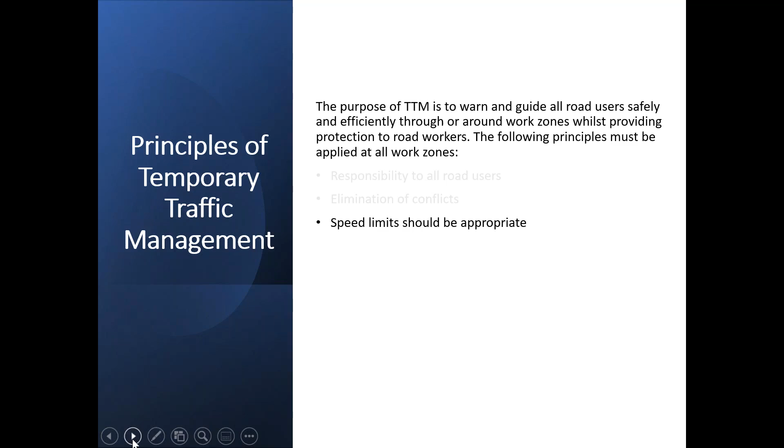Responsibilities: traffic management requires the contractor to provide a level of responsibility, a safe responsibility to all road users. It's designed to eliminate any conflict between members of the public using the carriageway and those conducting the works. Speed limits should be appropriate throughout the traffic management at all times, and it's designed to protect the people actually doing the work.

So we look at barriers, different types of barriers. We can refer to the protection area of the workers, the work zone, and early warning of any hazards.

Now, the biggest hazard the driver is going to face is that there is something in the middle of the road that he's been driving down for the last year, and all of a sudden there's concrete barriers, signposts, machines, low loaders, lorry loaders, etc. Traffic management requires that we provide early warning to these drivers so that they can take the appropriate actions to avoid what is now in the middle of the road.

Clear directions to all road users, to navigate around any obstacle or obstruction, be it excavation work, reinstatement work, etc. It requires that traffic control devices must be deployed appropriately.

When we look at words like adequate, suitable, sufficient, appropriately, that means we have to comply with the requirements of the work zone traffic management guidance document. Although it's not a statutory document, more of a contract document, where it says appropriate, suitable, sufficient, to demonstrate due diligence we follow the work zone traffic management guidance and the advice given within it. Because it's a guidance document, it can be a little bit flexible, unlike legislation requirements.

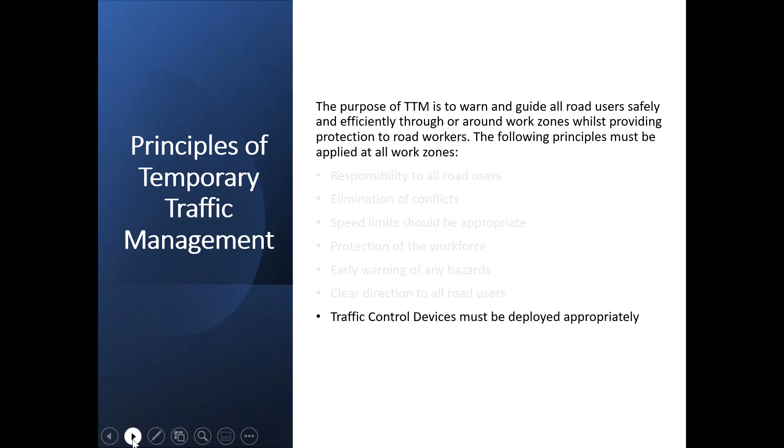The first document, and probably the only one I'm going to cover, is the traffic diversion plan, often referred to as the TDP. This outlines, and in a particular traffic diversion plan, you'll have copies of the registration forms, any permits required to close the road, excavate on the road, etc. These are some of the documents you'll find in your TDP.

Traffic management drawings show the layout and the amount and locations of any traffic management devices you're going to have as part of your traffic management. These are all sketched out, and they require a number of approvals - the police, Ashghal, your consultant, and municipality as well. And if one of those signatures isn't there, then I would suggest your TDP is invalid.

So make sure everyone's aware. You do get some conflict between Ashghal and the police or the consultant or someone else, but it's up to the person managing these works to sort out those issues, sort any conflict out regarding what is required.

But the main thing is these drawings - there are examples of traffic management plans in the back of the work zone traffic management guidance. As long as you follow the examples - 3-lane carriageway, 2-lane carriageway, single-lane carriageway - go out and do a recce, a survey of the works, your TDP should be fine. Just bear in mind, don't over-engineer stuff.

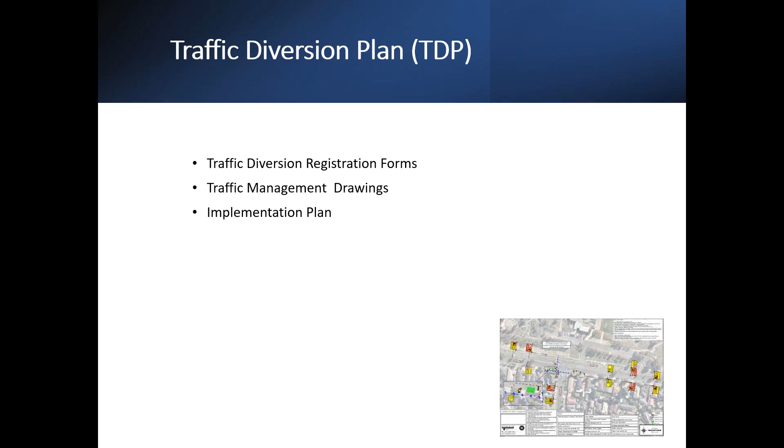As I said, a clearance plan and a contingency plan for any disasters - there's no such thing as a guaranteed safe system of work. You're working with road users, individuals you have no control over. You can't control their speed, whether they're on a mobile phone, or if they're having an argument with the wife and not paying attention. So you need to have contingency plans for emergency situations.

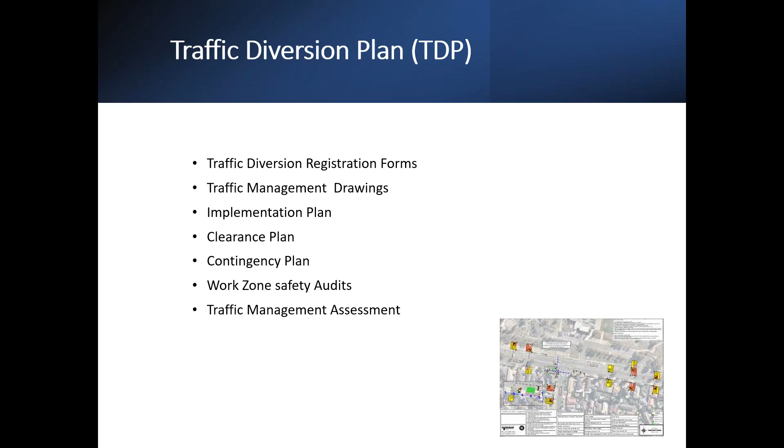ASHGAL will and can come out and do work zone safety audits to check that you are complying with your TDP, and if you are not, they can revoke and suspend your works or give you a prohibition notice or improvement notice. Traffic management assessments should be done internally by yourself, but these can also be carried out by your consultant or ASHGAL themselves.

So let's look at components of the highways. Now we have the carriageway, which means where vehicles can drive and pass along during their journey, but it also includes the median. Some highways have a central reservation filled with roadside furniture, lights, poles, grass, etc. In Qatar, a lot of the medians, the central reservation, is fenced off to discourage people from walking from one side of the carriageway to the other.

The carriageway also includes, at the same level, any pathways or cycling lanes. So you need to consider that as part of your TDP, your traffic management plan. If curbs are at the same level, you're going to have pedestrians and cyclists traveling along that pathway, so you need to consider the protection of those people during your design, your traffic management design stage.

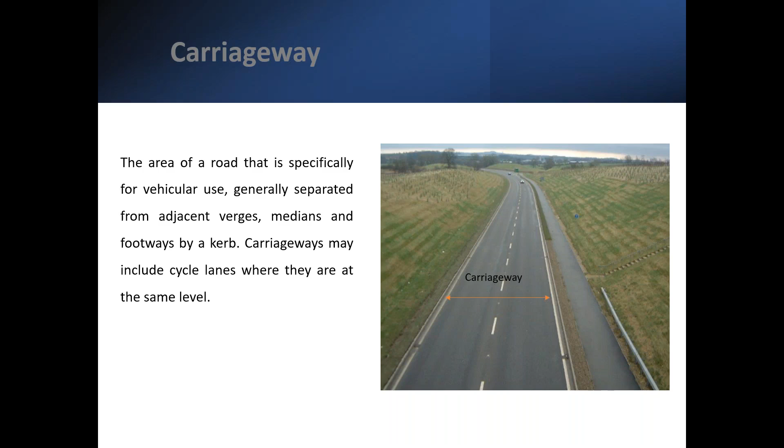So that's basically a typical single lane carriageway, cars coming from left to right and right to left. And obviously we have double and triple lane carriageways. So that's the typical carriageway.

Then we have the right of way. This is the area of public highway, generally between property boundaries, and it encompasses the carriageway, the median, the footpath, and the clearway, which I will discuss a bit later. So that's a typical right of way.

If you are doing any traffic or construction works within this area, you need an approved TDP prior to commencement of the project taking place, not afterwards. And if it expires, make sure it's renewed before the expiry date. Like I said, what you don't want is an errant vehicle crashing into your traffic management and you find out that your TDP is invalid. It will cost a lot of money - basically your site will not be insured. So that's generally the right of way.

If you create any obstruction on the right of way, then you need a TDP. Okay, carriageway, cycleways, footway, verges, and the medians.

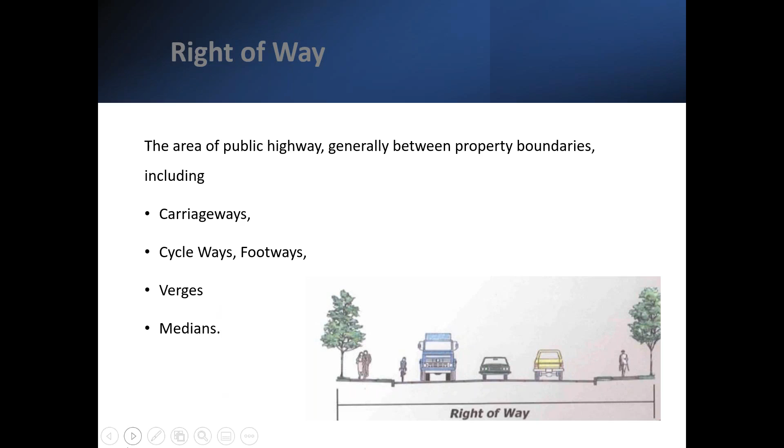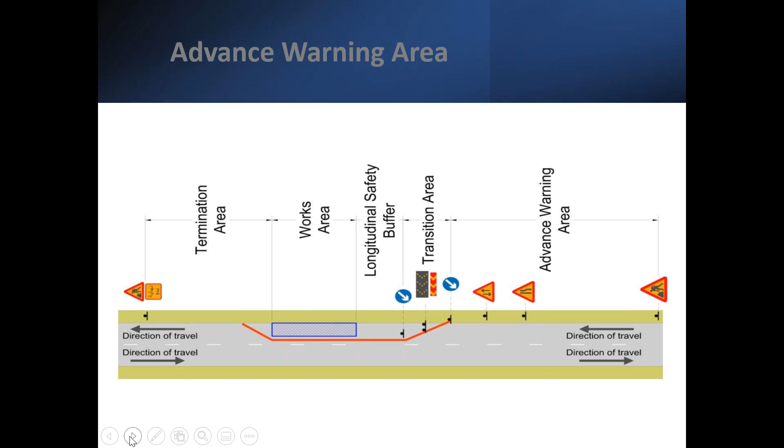Advanced warning areas - as I mentioned earlier, you need to give adequate warning to drivers, all members of the public, that there is an obstacle along their route, in the direction they are travelling. The advanced warning area is generally made up of specified signage, standards-type signage. I'm not sure what the number is, but they have to meet certain specification. These warning signs are located indicative of the speed of the traffic, so the greater the speed, the greater the distance between each sign.

So, advanced warning area - approachers are informed that they are entering a work zone, i.e. that you've just dug a great big hole in the middle of the carriageway, or are doing some other work that's going to inhibit their driving.

If a temporary speed limit applies within the work zone, we need to give all drivers enough warning so that they can reduce their speed and drive past the work zone, or on some occasions through it, at the correct reduced speed. There's been a lot of research, particularly with the Transport Research Laboratory in England, about certain speed limits, because if you reduce it too quickly, you get a spring effect where one car brakes, the next car brakes, and the fourth car slams into the back of the other one. So the speed reduction sometimes might be gradual, from 100 to 80, from 80 to 50. But the reduction in speed needs to be well advanced so that all drivers can adhere to it. The length of the advanced warning area varies according to the approaching speed.

Your traffic management is implemented based on the approaching speed, not the speed you've reduced it down to. So if your speed is 100 kilometers and your warning signpost should be 100 meters out, that's based on the current speed, not the reduced speed of, say, 50 kilometers, where advance warning signs may be a little closer. Traffic management is always designed and installed based on the current speed, not any speed you use to slow traffic down.

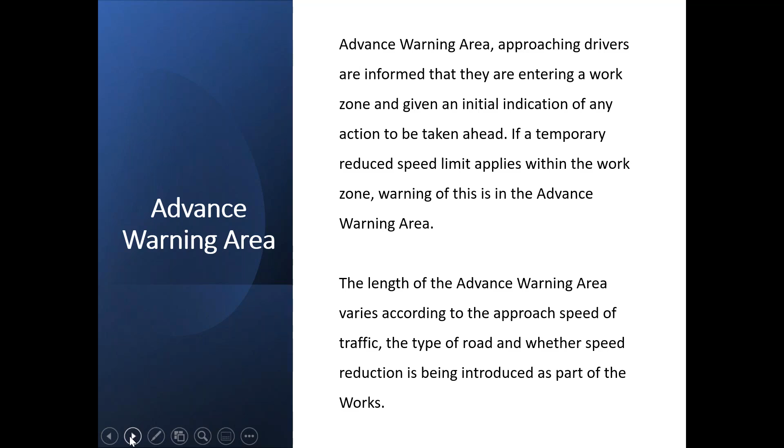Standard signs need to conform to specifications you can look up - warning, mandatory, regulatory, information and directional signs all need to meet the spec. You can't just cut a piece of wood, paint it white, and start sign writing your own signs. They need to be visible both in daylight and at night time.

The reflective quality has to be correct as well. But you can't mix the signs up - you can't put a regulatory sign on a blue background, or a directional sign styled as a warning sign. So that's the background for signs.

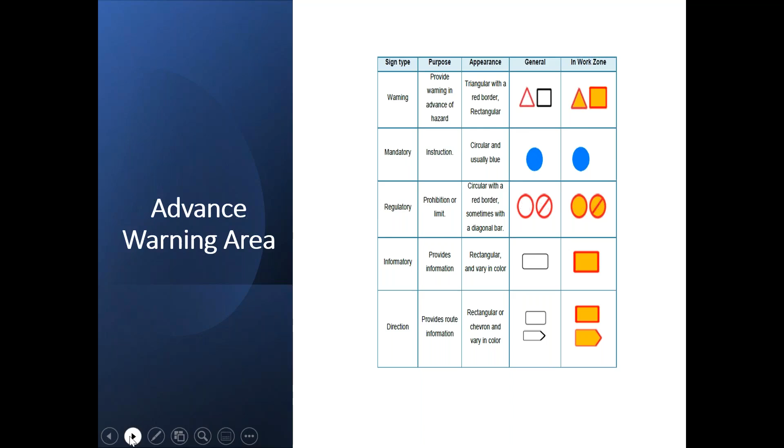The size is determined by the speed of the approaching traffic. Signs associated with a work zone speed should be taken accordingly. If a temporary speed limit applies, signs in the work and termination area may be reduced by one level - for example, 120 within a work zone subject to temporary speed signs may use 900 millimeter signs rather than 1200 millimeter.

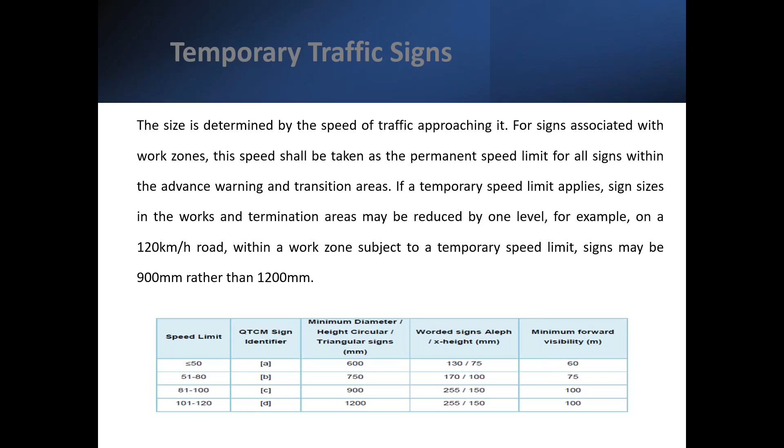Basically, every traffic device you install is based around the speed of the current traffic. This table shows what type of signs you need - for speed limits 51 to 80, 81 to 100, it shows the sign identifier, height of the signs, word signs, height of the letters, and minimum forward visibility for each sign. This prevents someone in the back of the yard making up their own signs to fit their own purpose based on whatever material they've got. These signs have to meet specific specifications to give the driver advance notification that there's something in the middle of the road ahead.

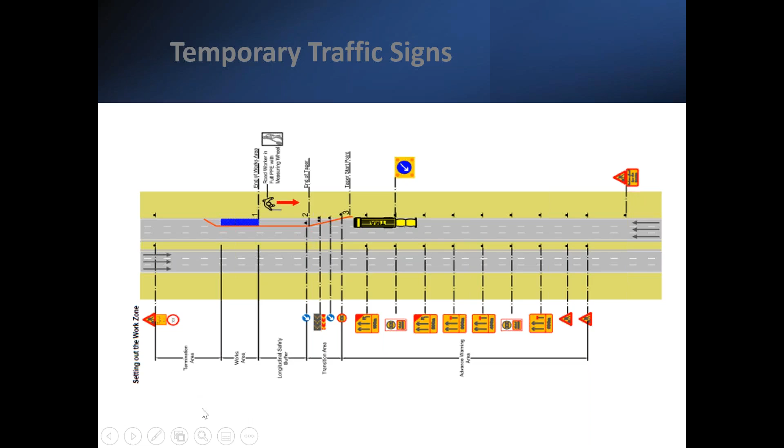Temporary signs - I see a lot of these stuck on posts or posts surrounded by concrete so they don't blow over or shift. But bear in mind it says at the beginning that signs have to be able to shear on impact. You don't have control over all drivers or the manner in which they drive, and there are occasions when they're not paying attention and the first thing they hit is one of your signs. These signs need to break off and must cause minimal damage if hit by a car, and generally they shear at the bottom so they lay flat.

If you hit anything else, such as a concrete pole, you are going to cause severe damage to the vehicle on impact. And on some occasions, we've seen profiling and modeling where a vehicle has hit the bottom of the post and the top of the post has gone through his windscreen.

So there are specifications on how you should support your signs. It says all temporary sign support structures must meet relevant crash testing specifications, such as EN 12767, and be approved for use by Ashghal, which means you cannot just stick a sign on a tree next to your work zone or on a lamppost. The purpose of traffic management is to ease cars through and reduce the severity of injury if there was an errant vehicle, so signposts and the structure supporting the sign all have to meet specifications.

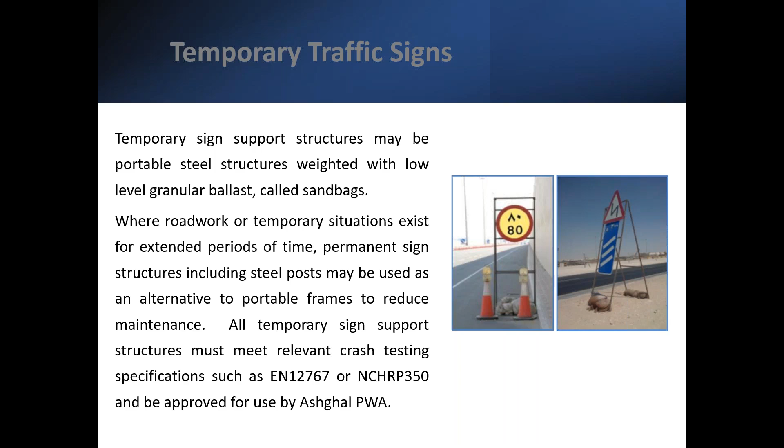Transition area - this is the area that the driver will see, or hopefully not see, before the work area. This should provide enough information for the driver to either stop, meaning he can't proceed any further, or he needs to switch lane.

The taper is indicative of the speed - the faster the speed, the longer the taper. These have to be lit up so the driver can visibly see them, and this is where you get your directional signs, your LED signs, and directional accent, because it's giving the driver the last warning that he cannot proceed any further without causing an incident to himself or anybody working in the area.

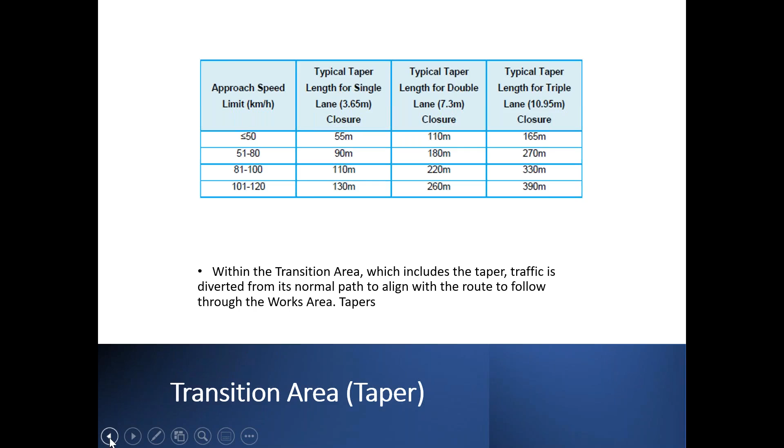What's most important is that you store no material here. As I said, if a car was to hit that, we need to be able to reduce the severity of injury or damage to the vehicle. Sometimes these are cones and plastic because they're just a transition area here - if a car does hit that, you don't want it driving into a block of concrete blocks or other construction material that would cause a lot more damage than hitting the barriers here.

The length of that is indicative of the speed of the road, and on high-speed roads, you'll probably find that that is somewhere up here, once again to give the driver enough time to respond and move out of the way. And that's some drawings.

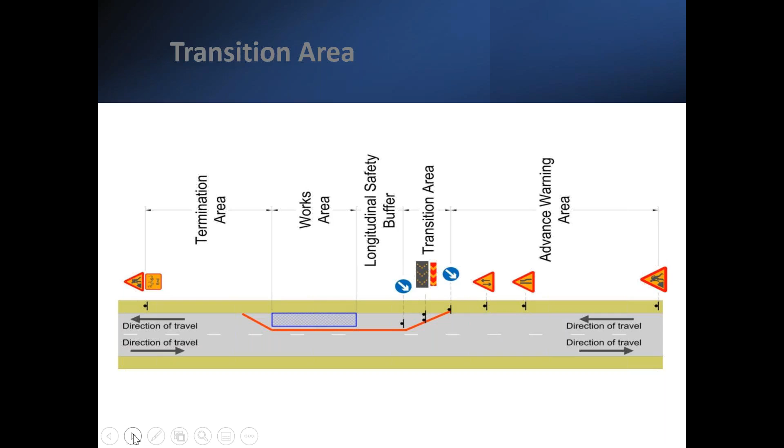The taper is based on that timing, but in some local residential areas it may be impractical or not reasonable to install your taper in line with the speed limit. So where the speed limit is reduced, or at a speed of less than 50 kilometers, you can use a 1-to-1 ratio. Having said that, you still require a buffer zone between the leading edge behind the taper and the work zone, because a 1-to-1 ratio is very short.

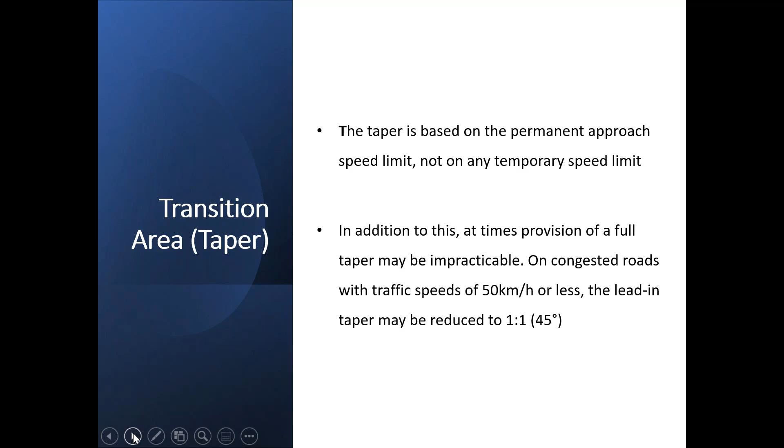What you can't have is your traffic management perpendicular to the carriageway - it always needs to be at an angle, even a 45-degree angle. If you're using plastic barriers, that's still 4 or 5 plastic barriers that you would need. So it's not just the case of, oh, we've got a truck pulling up for 15 minutes, we'll just stick a barrier in the way - that wouldn't be appropriate or suitable. That's the taper area.

We have the workspace between the taper and the buffer zone here. Once again, this is for the errant vehicle to crash through - probably not the best word - and continue.

Don't forget he's on his brakes here. Hopefully he's on his brakes. So he should come to a stop within the buffer zone here if he's traveling at the correct speed before he gets to the work zone, which is where all the workers will be located.

This area here must be kept clear at all times to accommodate any errant vehicle from missing the taper end and driving through your traffic management. So once again, the safety area, the buffer zone, longitudinal safety buffer must be kept clear of all construction materials.

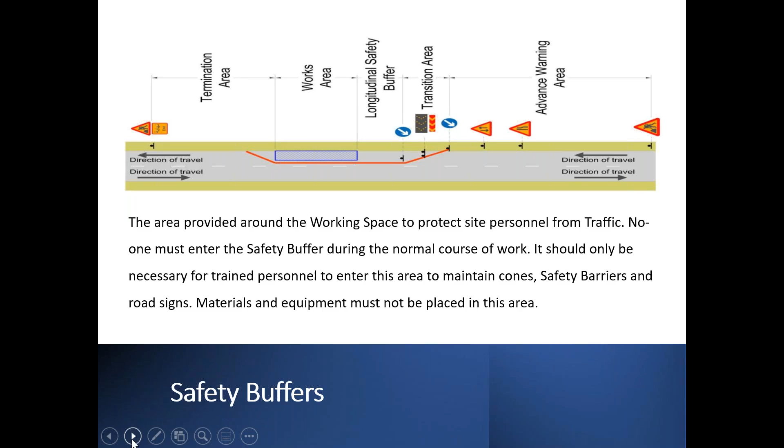There is also a typical length of the longitudinal buffer area. Once again, at 120, the buffer area should be 55. So if you add that to your taper as well, for example that may be 130 meters long, add the two together, and that is your area of safety for your staff, and that is the area where the vehicle under its own steam should be able to stop without driving into your work zone.

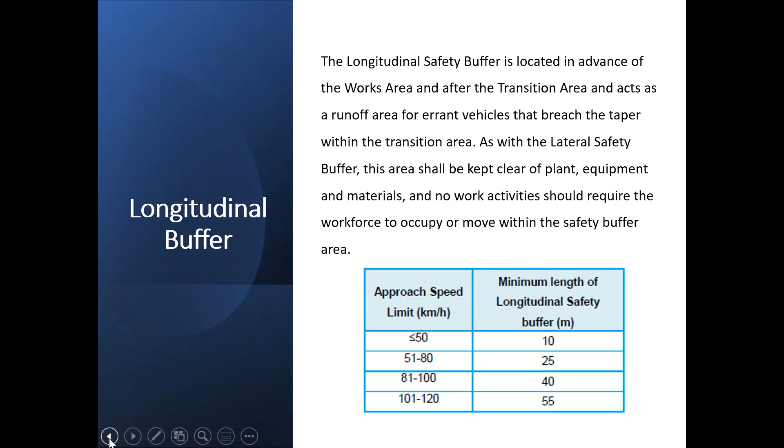Remember, we're protecting the workers as well as members of the public. So there's tables there that will give you guidance and reference on distances. The distance between your work zone and the edge of your traffic management - you now have the calculations for this in the table, and this is your safe area.

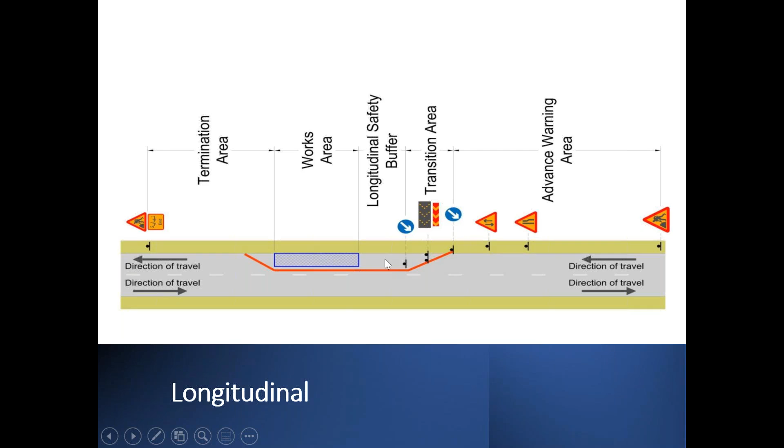There is also another buffer area, and that is to the side of your work zone, and that should be around about 1.5 meters. Why it's 1.5 meters is because under a number of tests, if these are concrete barriers and they are secured, the deflection of a concrete barrier will be less than 1.5 meters, providing - and this is a caveat - that they are connected together.

If your concrete barriers are not connected together, then they create more danger than if they weren't there. A concrete barrier will fall into an excavation if it's hit by a vehicle traveling at 30 kilometers an hour. There are cases where that has occurred, and you do not want a 250 kilogram concrete block falling on somebody's head. So there is a buffer zone of 1.5 meters.

The problem is in some areas your excavations are too wide, and therefore in order to install your barriers to provide a 1.5 meters, it means that you are encroaching on the other carriageway, and therefore you need a more in-depth, more detailed traffic management, or if the police allow you, a road closure.

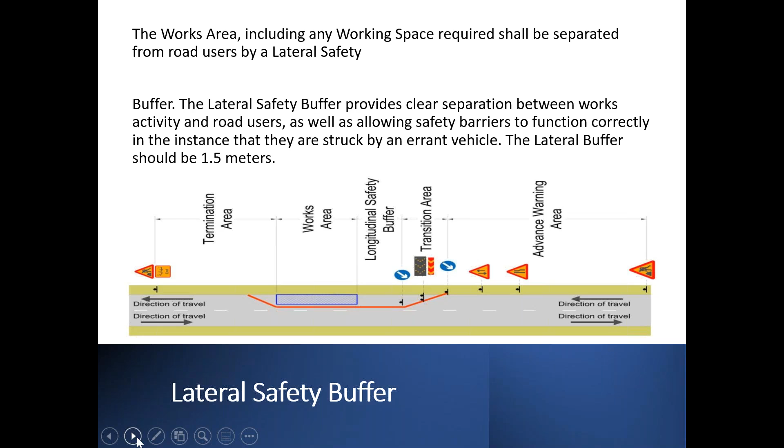So there's two safety buffers: this one here, the longitudinal safety buffer, and the lateral ones. Once again, to reduce the severity of injury of the vehicle or the men at work that are working within the work zone. And any diversion from those specifications probably will invalidate your approach.

So this is an example of a safety buffer zone, greater than 50 kilometers. Workman here, vehicle this side, and this is your pedestrian walk through here. So you have the concrete barriers here, 1.5 meters off the work zone. The work zone is protected with supplementary barricades, just to make sure that the workmen and the members of the public don't start getting too close to your work area, any plant or equipment.

But this is a typical layout of what you'd want to see on part of your traffic management. Two sets of cones, outer cone, inner cone. If you've got no pedestrians that are likely to walk here, providing these are 1.5 meters away from the workers, you should be fine. But if that car hits that, that will swing. So basically, all your work should be planned on the opposite side of the trench or the excavation away from any traffic management.

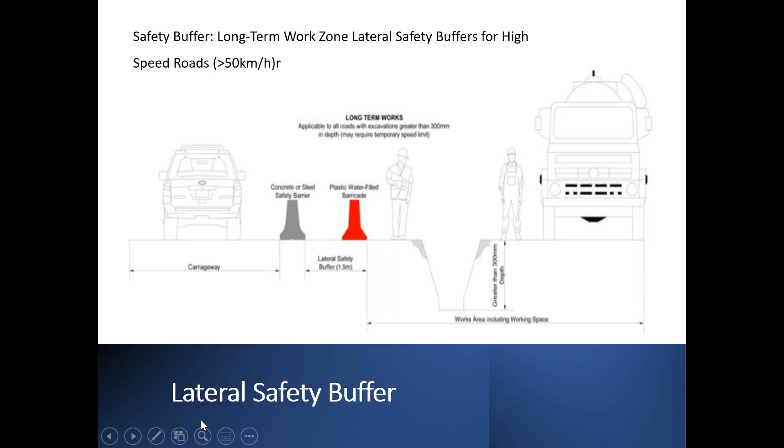Once you've protected your work zone with advanced warning signs, exit signs, traffic management devices and barricades, generally the work zone will come under QCS. The work zone traffic is about protecting members of the public and the workers, so it will come under construction safety, and QCS compliance will be required.

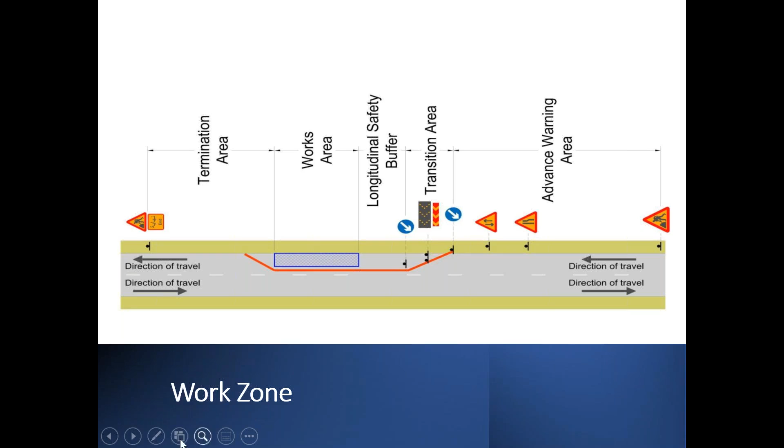Typical examples of a work zone, they can be in heavy congestion areas, or they can be small little temporary work areas.

Where you undertake any excavation work deeper than 300 millimeters, you must install concrete barriers. The reason being, if a car goes through a plastic barrier and continues into a 300 millimeter trench, it will probably capsize. So concrete barriers for trenches greater than 300 millimeters, and generally if it's long-term work, because you need to appreciate that plastic barriers move.

Your traffic management devices such as barricades are indicative of speed, congestion, population of the area where you're working, adjacent to schools where children play, etc. Probably that's the most critical part of your traffic management - what type of barricading are you going to use to secure your work zone.

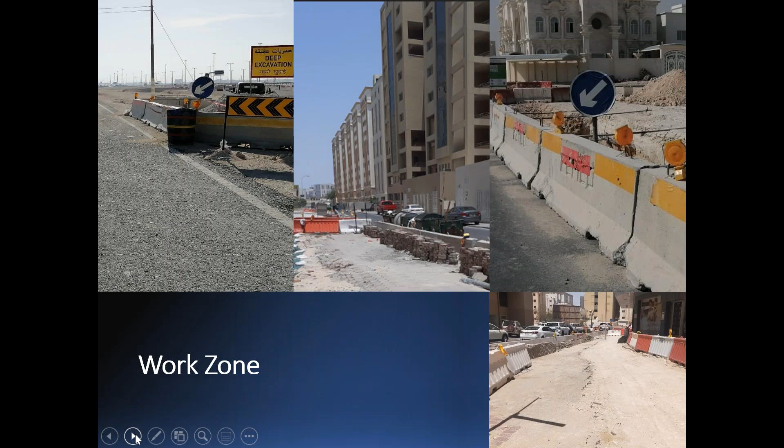So that's a typical work zone. Once you're in there, it will come under QCS, work at height, chemicals, electrical, plant and equipment, etc.

Temporary safety barriers have to be approved, both in design and the material that you are using. Sometimes they're referred to as F-shape, Oregon, etc, but they're all designed to direct the traffic away from the work zone - concrete ones I'm referring to here.

All safety barrier systems used in temporary traffic management - individual barriers, connection, attenuation - must meet minimum performance requirements. If you use poor concrete, they're just going to shatter like paper. If they're not connected, they're going to move, and what you end up with is a concrete barrier sitting in the driver's seat of the vehicle that just smashed into it. So the most crucial part is you need to make sure that your barriers are connected to work properly.

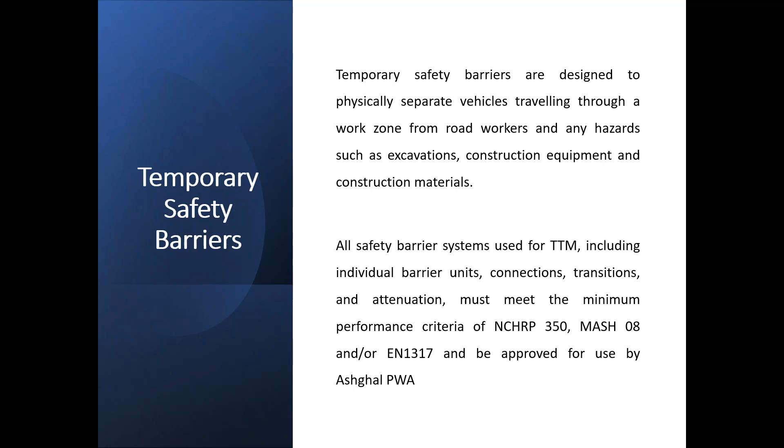Locations, types, and selecting your types, whether you use plastic, concrete, or cones - there's a nice table in the work zone traffic management which will help you do that. It's based on speed of traffic and the length of the works - for example, short-term works, like using a MEWP to change some light bulbs in an overhead light that's failed.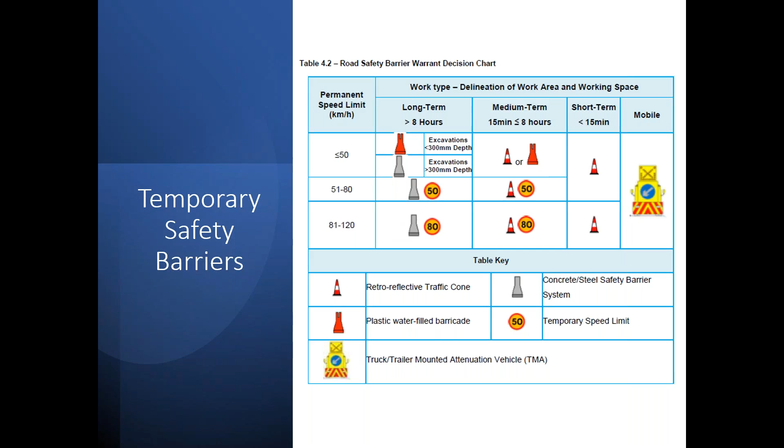Okay, temporary safety barrier, this is just another picture. Try to alternate colours, it makes them a bit more visible, whether they're red, black, red, white. I have seen some blue ones, so I'm not sure how they got approved.

And reflective materials here - don't try and glue them on. The heat will just dissolve the glue and then you'll end up replacing them, which means you need to put a man in the middle of the carriageway. So if you're going to install stickers on your concrete barriers, make sure that they're clean and stuck properly, or fixed with expansion bolts, etc.

But that's a nice example of how you would want to see traffic concrete barriers.

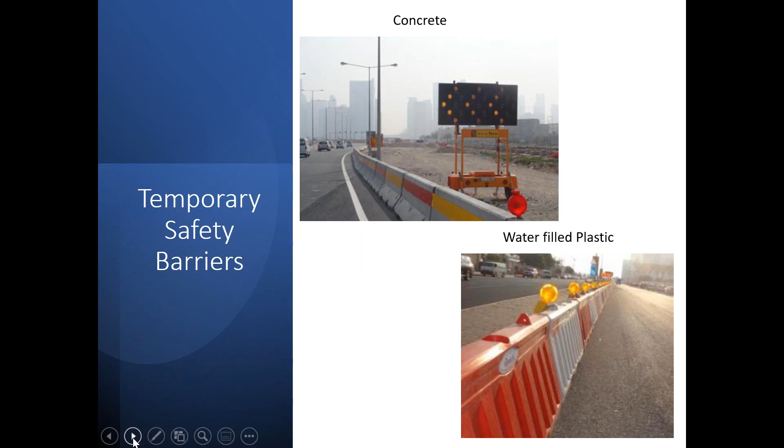Okay, plastic filled water barriers. We know that in Qatar evaporation exceeds rainfall, and it doesn't take long for standing water to evaporate. If they evaporate, it means you need to refill them with water, which means you now need to place a water tanker in the middle of the highway without any protection. This is where you would want a TMA in place, a crash cushion.

So we see sandbags that are sand contained in plastic, and the plastic gets too hot and melts, and then you end up with a load of sand on the floor, creating another hazard. To be honest, I'm not really sure what the solution is other than to fill them with sand, but then it makes them difficult for transporting.

But whatever method you use, your plastic barriers need to be connected and resilient to wind. We have some strong winds in Qatar, and you're guaranteed - take a drive after a windy day and you'll see these plastic barriers plastered all over the highways. So they need to be robust enough, or sited enough, that they're not subjected to wind tear.

They also need to be resilient enough to stop people from taking shortcuts and moving them. So things that can help are making sure they're connected, and that it's awkward for them to remove the barricades. If they want to jump over them, then they do that at their own peril, at their own risk.

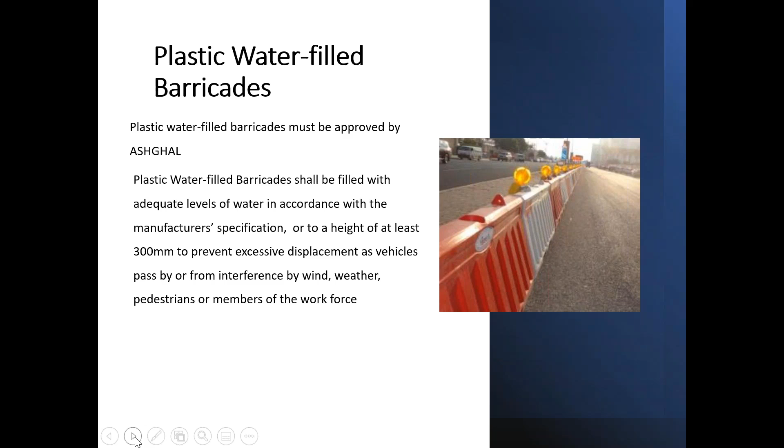A 2-ton vehicle traveling at 30 km/h generates enough force to shatter the bumper and the engine, so your bones aren't going to last that long. You won't survive the impact, basically, and modelling of research has shown that.

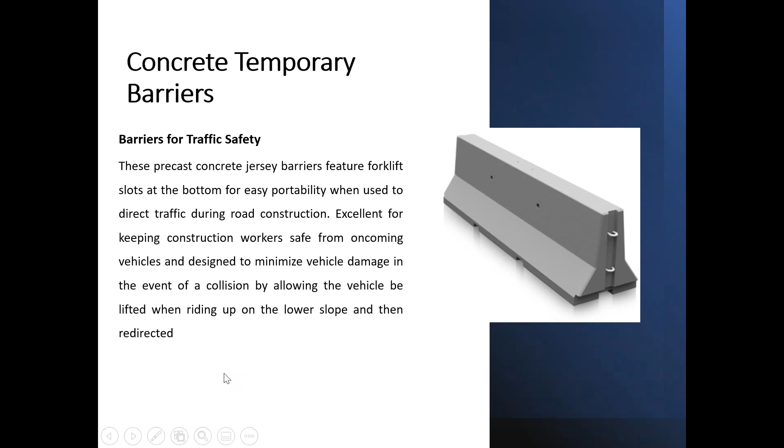The strength is not in the concrete barrier itself, but it's in its connection. You can go on YouTube and look at crash tests, and look how effective these barriers are when they are connected. Now, there are alternatives - people using supplementary pins, but I'd always advocate that you use the correct design pin and not just a 16 gauge or 12 gauge rebar, or some tensile wire to tie them together.

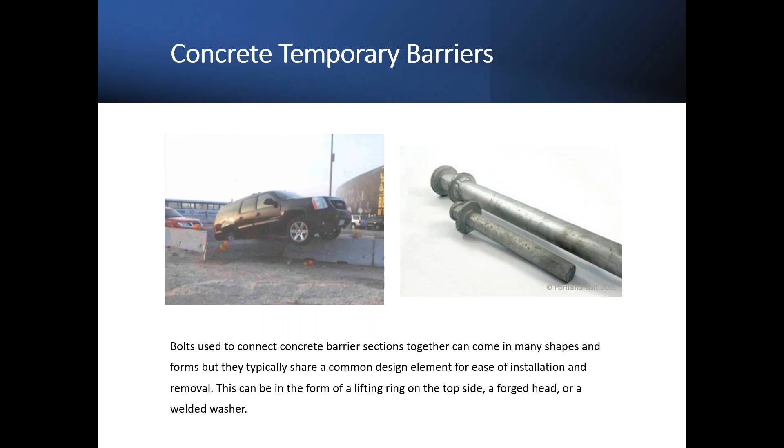Remember, these are designed to stop people from killing themselves, both the driver and the vehicle. So traffic barrier integrity is critical and important here. But you wouldn't ask anybody who oversees, manages, or supervises traffic management not to enforce that these barriers are connected. As I said, one barrier alone is a death wish, to both the driver and the operator.

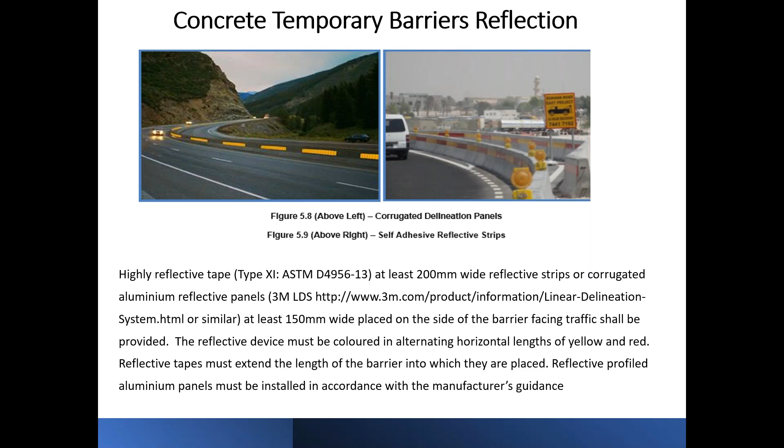So reflective materials, as I mentioned earlier, need to conform to specification as well. You can't just go there and start painting reflective materials on or making them up on a printer in your office. These are subject to specification, and the spacing too. If you're traveling fast and they're too close, you just get reflective glare, and that applies to lights as well. There's guidance there, and I believe this handout is readily available on the IIRSM webpage or our branch webpage, so you can go back and read the material.

Lamps and warning lamps - the requirement QCS says that they need to be in place during day and night, but ideally they need to be working at night time. We don't need to go around and check that your lights are all working when the sun is out there shining, because it's just a waste of time.

There are spacing requirements as well, and if you're not familiar with the moth and the flame situation, briefly - where you look is where you go. So if you're driving along and you're seeing all these flashing, blinking lights in your eyes, it's causing a distraction from what you should be focusing on, which is driving along safely. So make sure your lights are spaced correctly. Otherwise, you'll just get the disco effect and the disability glare - disability glare, not reflective glare.

You only need lighting where there is an obstruction in the road to provide additional warning. Now, I'm not comparing two standards here, but Chapter 8 and an early version of the work zone standard advocate that you do not need flickering lights where you've got overhead lighting, because you can see the barricades easily enough, and the flickering lights will not add anything to reduce that risk. Having said that and dismissing it...

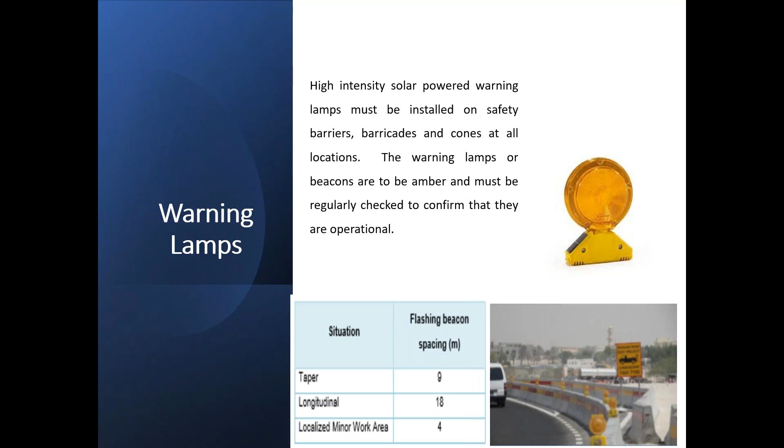The clear zone allows vehicles that have lost control to come to a safe stop without hitting any roadside furniture or construction materials, safely under its own braking. So even if you are beyond the work zone or right of way, don't start storing materials, excavation plants, machine 360s, etc. in the clear zone. That needs to be kept clear at all times.

Having said that, you do get lamp posts in there, you do get the odd bench, but during the work zone these areas will be protected by advanced warning signage and maybe some light cushioning. This is something you need to consider as well.

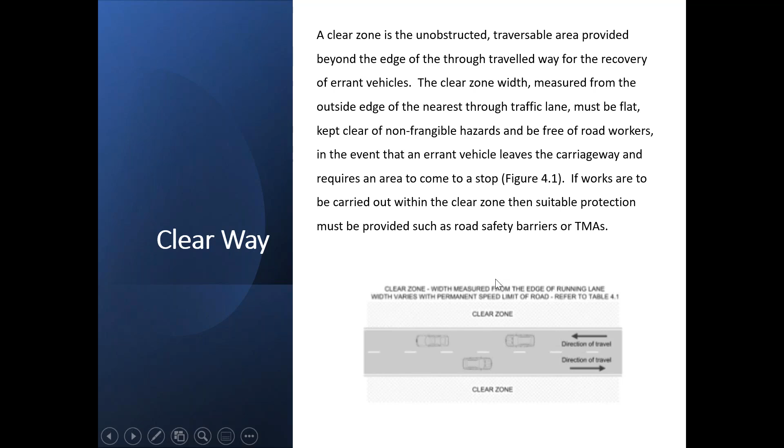Part of your traffic management is the clear zone. How wide should the clear zone be? Once again we have this lovely little table that tells you. So at 100 to 120, your clear zone should be 12 meters away from the traffic management or your work area.

However, in some cases, an object beyond the clear zone may still require removal or shielding.

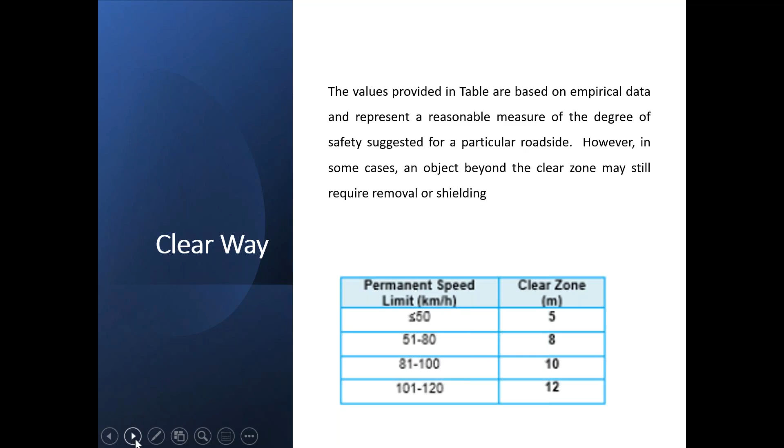Pedestrians. Pedestrians are a nightmare, and they're a nightmare because you have no control over them. You have control over the workers, visitors, the client entering your work zone. What you don't have control over is a member of the public deciding they're not going to walk around, they're going to walk through your traffic management or work zone because it saves them 5, 10 or 20 seconds.

So foreseeing that and knowing it's predictable, we have a duty to consider pedestrians as well. Within any work zone, make sure part of your traffic management design considers the safe access and egress of pedestrians walking past your work zone, because if you don't, they will walk through your construction area.

I think there was a slide earlier that says it should be 1.5 meters. It cannot be any less than 1 meter because it needs to be accessible for wheelchair users. That pedestrian area is not an additional area where you can start storing construction materials, etc. It must be kept clear at all times to encourage pedestrians to use it.

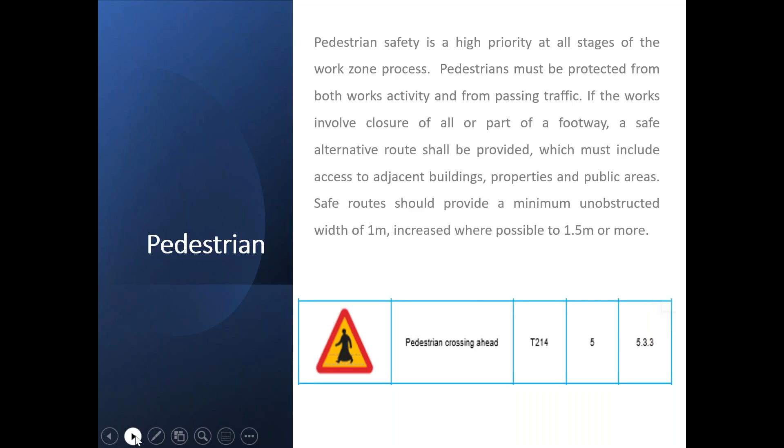A typical example of a pedestrian area is this one here. Pedestrians are protected by concrete barriers and prevented from entering the work zone here. As I said, all these drawings and examples are contained within the work zone. So make sure you consider pedestrians, because when you do your survey or look on Google Maps, that's something you may not initially think you need to consider.

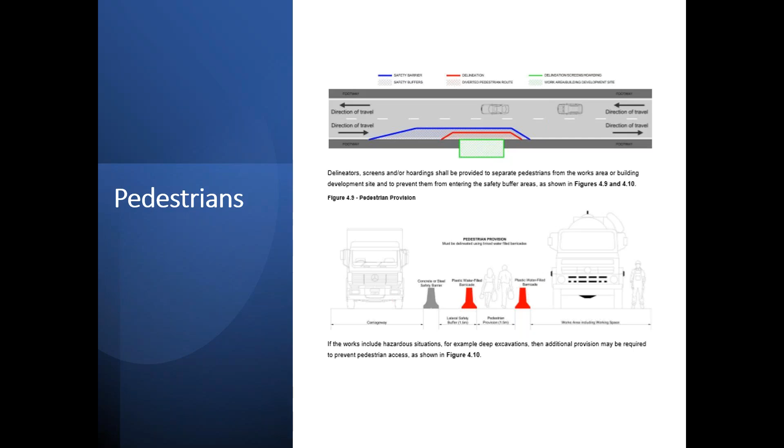Look around when you're driving, see how many pedestrians walk through. Oh, okay, did I prematurely select that? I think I did, go back.

So, summary. Principles of temporary traffic management is to provide the smooth transfer of traffic from one place without being inhibited by any obstacle put in the road. We have a contractual requirement, although not a legal one, but due diligence will be expressed by conforming to the work zone traffic management requirements as industry best practice. We defined a carriageway where the cars run, and the right of way, which includes where the cars run, the median, and where pedestrians and cycles go.

We've discussed the work zone, i.e. the advanced warning area, which is one of the most critical parts and is subject to thorough inspections to make sure the signs remain visible, clear, and properly located. We've discussed the transition area and its length as per the table, safety buffer, work zone, types of temporary traffic safety barriers - concrete, cones and plastic - requirements for lighting, clear zones and pedestrians.

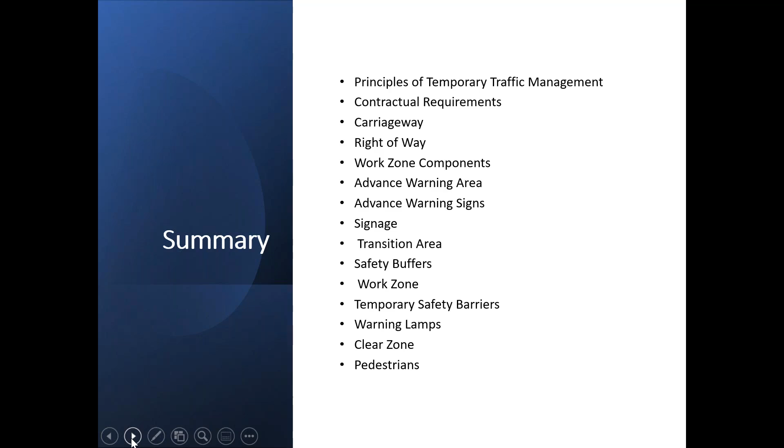So now all we need to cover is, has anybody got any questions?